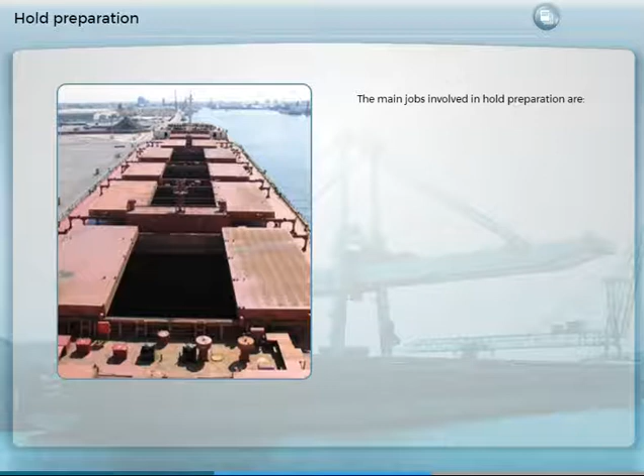Bulk carrier holds often have adjacent ballast tanks that may be prone to water leakage through grab damage. A careful watch should be kept for any signs of water ingress which may indicate such damage.

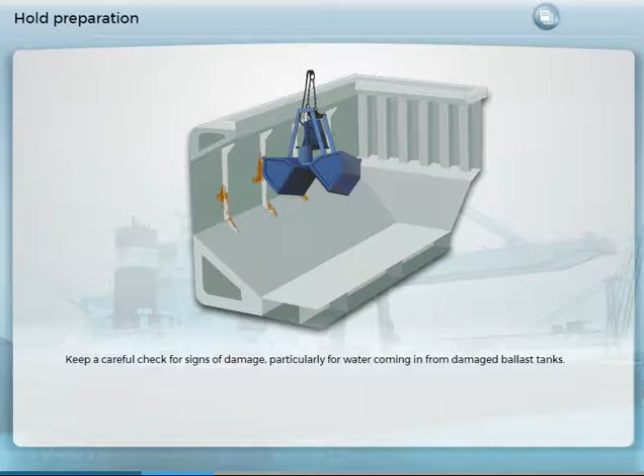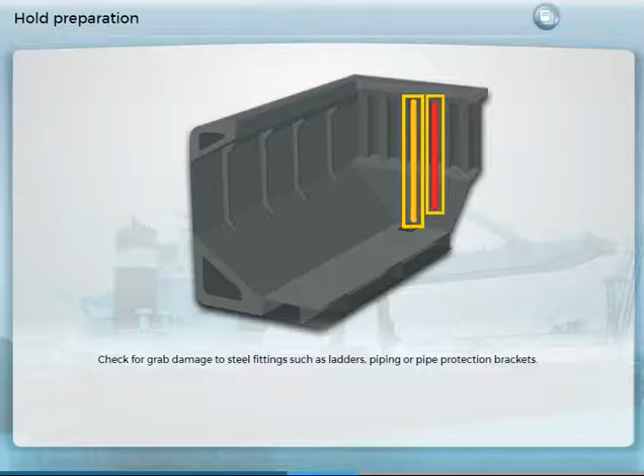During discharge or hold cleaning, any damage to the ship's structure or fittings should be noted, including tank top and ballast tank puncturing grab damage, grab damage to fittings such as ladders, piping or pipe protection brackets, tank top, double bottom and side tank access lids damaged by bulldozers and grabs, and hatch coaming damage which may reduce weather tightness of hatch covers.

Any such damage should be noted and repaired on a continuing basis, so steel fittings torn from the ship's structure by grabs or bulldozers, or ingress, do not cause cargo contamination. Such damage should also be reported routinely in support of a claim against stevedores for damage to the ship.

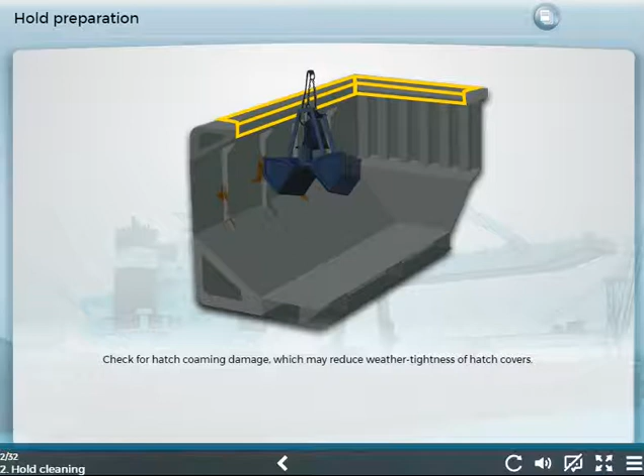After carriage of bulk cargoes, the holds must always be swept before any attempt is made to wash. This reduces the possibility of cargo residues building up in hold bilges and prevents washing water being pumped out.

It is helpful if the stevedore at the discharge port removes as much of the cargo as possible, including initial sweepings. This should include any cargo residues which may have got into the hold bilges.

Holds are swept instead of washing when washing is not required or is not possible. A charter party will specify that the ship is redelivered swept clean or shovel clean.

If it is swept clean, the stevedores at the discharge port sweep the holds at the end of the discharge to minimize the cargo residue.

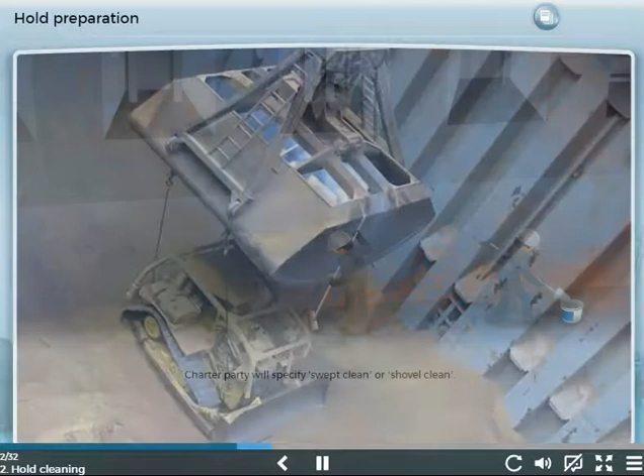If it is shovel clean, the stevedores are only required to discharge cargo that can be easily accessed with a mechanical shovel or a bobcat. Holds that are shovel clean may have several tons of cargo remaining.

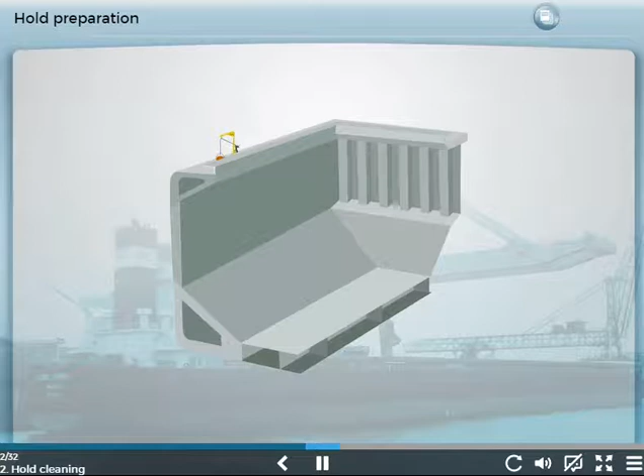If required, any remaining cargo residues must be swept up by the crew and brought on deck using muckers for disposal as permitted. Any cargo stored on deck should be stored in drums or covered to reduce chances of dust pollution.

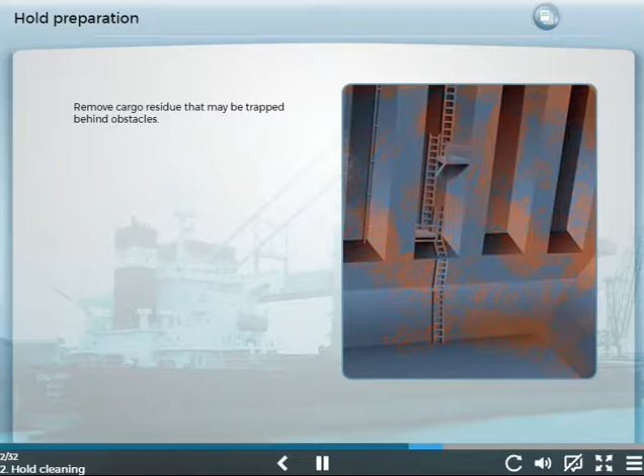During the sweeping, care should be taken to ensure that any residues trapped in places such as accessible pipe guards, access ladder rungs, behind frames and frame knees are removed.

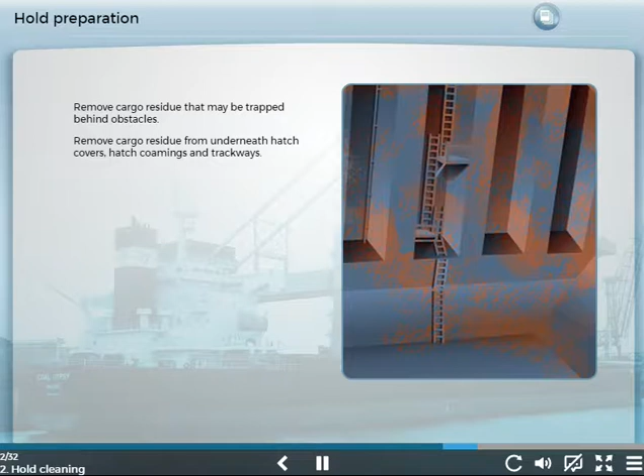Hatch cover undersides, if not boxed in, are swept to remove residues that have accumulated under the covers. Coamings, hatch trackways, hatch access ladders and spaces are cleaned.

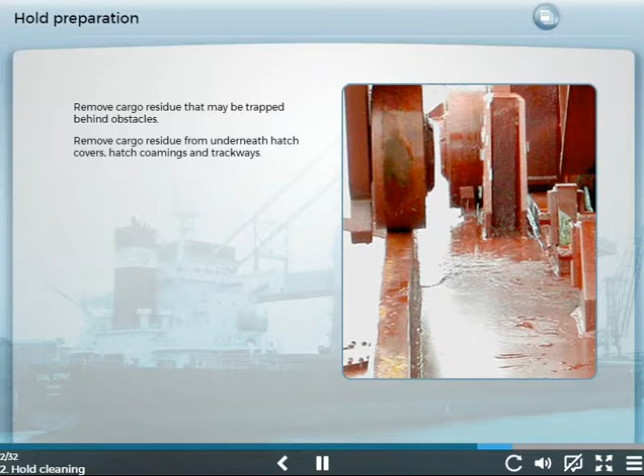During this cleaning process, the hold bilge wells should be opened and cleaned to remove any residues that may have fallen into them. The parts of the hold that crew access for cleaning may be limited because of the size of the holds.

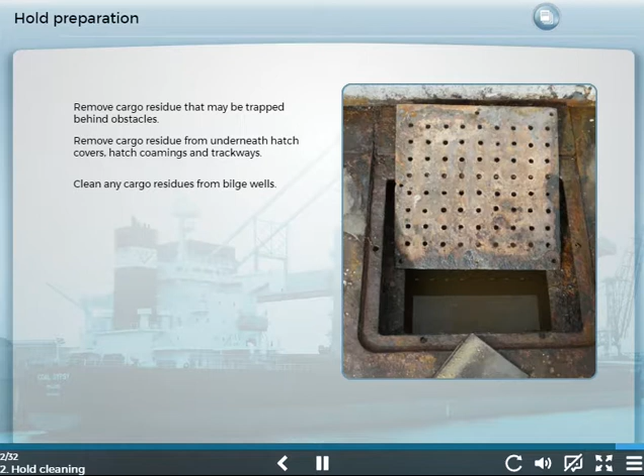Some high-level access may be possible only with scaffold towers, if these can be safely rigged. Even with equipment, there will still usually be areas that are inaccessible.